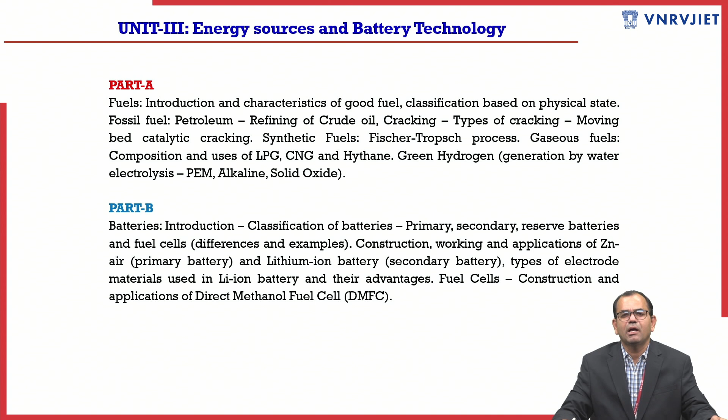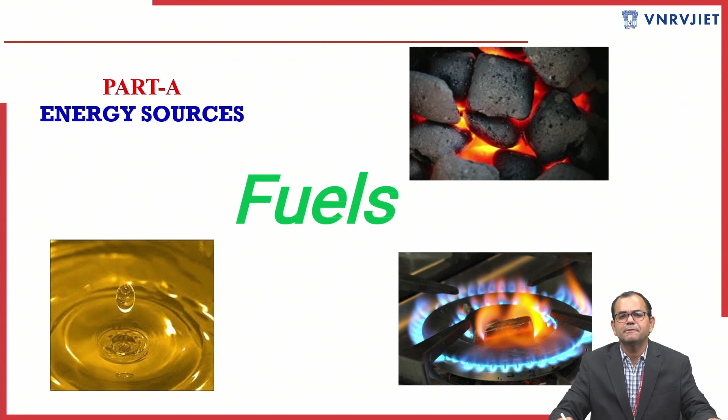Now this is the pictorial representation of energy sources, all three forms. We can see here coal, which upon burning gives energy in the form of heat, and liquid fuels basically kerosene, diesel, petrol, etc. And here gaseous form of fuel, basically CNG, LPG gas, and many others like methane gas, hydrogen gas, etc.

So before going into details, why different types of energies, and what emphasizes us to come up with alternatives - basically growing population means growing demand. Day by day population is increasing. Population increasing means the energy usage demand is going up. So that is why we are always looking for alternatives - thermal energy, hydro energy, wind power, solar power, nuclear power, various alternatives we are looking at all the time. That is because of the growing demand.

So basically when we talk about these fuels, they could be solid, liquid or gaseous. Upon combustion, any material which gives energy in the form of heat, that we can call a fuel. So basically fuels are combustible materials, and combustion happens inside the machinery - it's an internal process, not like burning which is an external process. So combustion is an internal process, and upon combustion there will be some byproducts like soot and smoke released, along with energy that helps us for the vehicles.

So this fuel is basically made of carbon and carbonous materials, and hydrogen. Main source of fuel is carbon and carbonous materials. Our other alternative is hydrogen and hydrogen energies. Now as represented, fuel - carbon plus oxygen - leads to heat energy. This is the energy. Whatever carbon dioxide and water molecules are given represented, those are the byproducts. So we are looking for this heat energy - fuel in the form of carbon, upon burning with oxygen, whatever energy is released, that is what we are looking for.

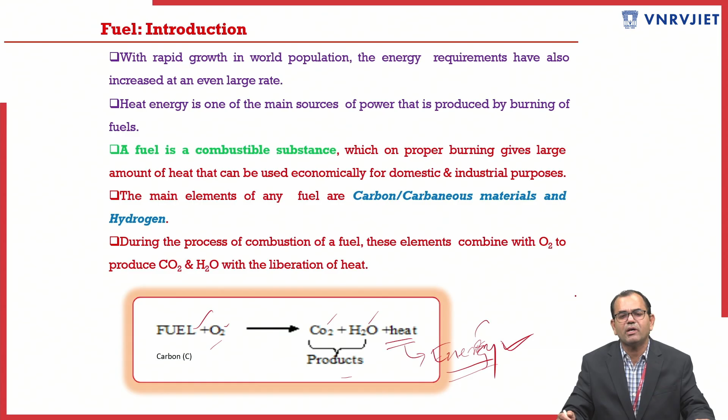Now basically based on the occurrence, these fuels are broadly categorized into two types: primary fuels and secondary fuels. Primary fuels are naturally occurring - these are natural resources like coal. Coal we are not creating. For example, when we talk about Singareni Collieries coal mines, located in Telangana, we dig and send that to NTPC, National Thermal Power Corporation, and upon burning that coal, steam will be generated, and that generated steam will be used for electricity production. That coal mine is a naturally occurring fossil and naturally occurring fuel.

So likewise, crude oil - when we talk about Gulf countries like Bahrain, Dubai, Kuwait, Saudi - all these Gulf countries have rich wells of crude oil, and that crude oil as it is we cannot use for vehicles. So once we refine it, only then can we use that crude oil for our vehicles in petrol, diesel form. So crude oil is a primary fuel, that is a fossil fuel, and whatever is extracted, the purified one taken from the crude, that is the secondary fuel.

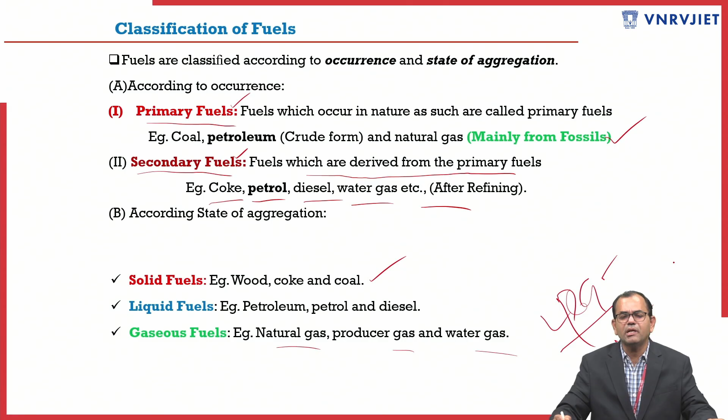Before going into the refining of petroleum and its applications, what are the characteristics of a good fuel? Fuel could be solid, liquid, or gaseous. What characteristics should a good fuel have? The fuel should be available at low cost so that everyone can use it.

It should have less moisture and ash content. Impure fuel gives more noise, more smoke, and more soot. The purer the fuel, the more the efficiency will be, and byproducts will be less. So a good fuel should have less moisture and less impurity.

It should have high carbon content. Greater the carbon content, more the energy. Lesser the carbon content means more impurities, and the energy will be less. So high carbon content means more energy, specifically in the form of heat, energy will be released more. The calorific value should be more.

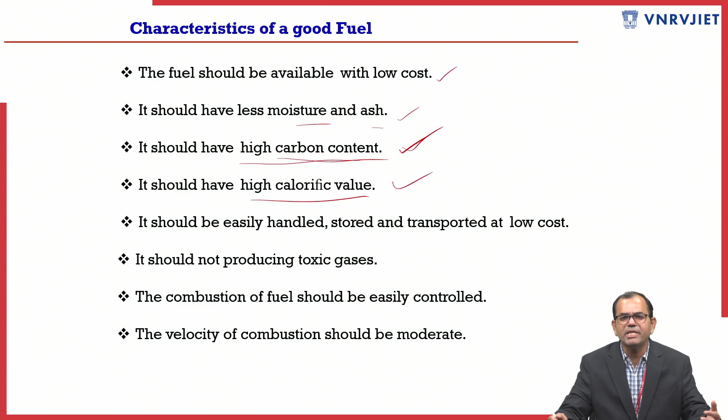Calorific value is nothing but: if we take 1 liter of petrol or 1 ton of coal, after burning 1 liter of petrol, how much energy is released? Or after burning 1 ton of coal, how much energy has been released? That is a specific volume and quantity - 1 kg, 1 liter, 1 ton. So from that specific quantity of coal and petrol, how much energy is released after burning - that is nothing but calorific value.

So any fuel should have more and more calorific value. And it should be easily handled, stored and transported.

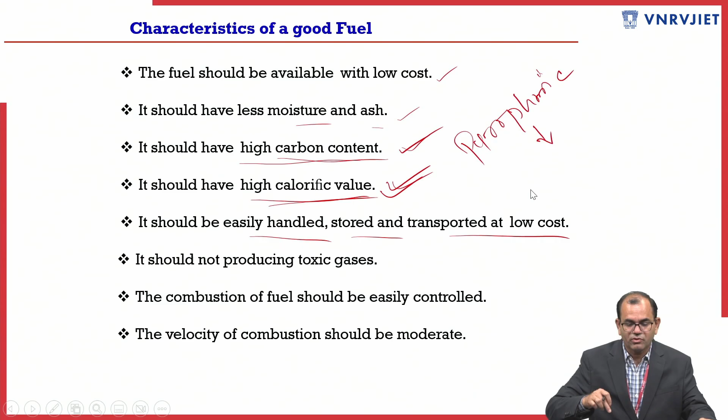As we know, petrol, diesel, kerosene are all highly pyrophoric. The word pyrophoric means which readily catches fire - fire sensitive. Pyrophoric means fire sensitive.

So when we are transporting and storing these kinds of fuels, we should be very careful. There should not be any fire accidents and there should not be any volatile kind of things. The fuel should not produce toxic gases like carbon monoxide, carbon dioxide - emissions which are harmful and lead to air pollution. So toxic gases should not be released.

Combustion of fuel should be easily controlled. Consistent ignition should take place, and velocity of combustion should be moderate - controllable, moderate. There should not be any sudden burning of fuel, because if there is sudden burning, explosion may take place. So these are the major characteristics of a good fuel.

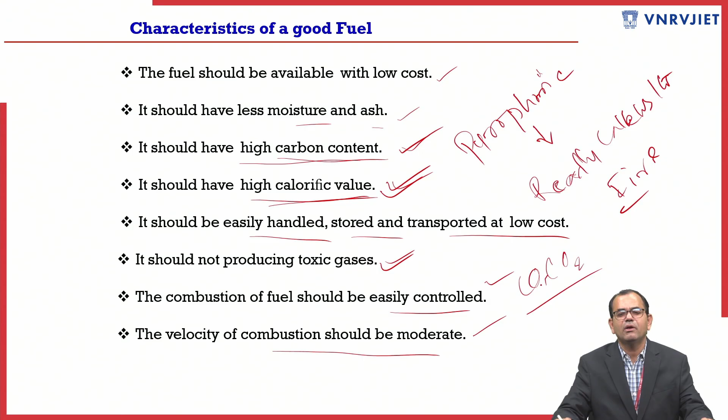Let me move forward. When we talk specifically about liquid fuels - petroleum, which is crude - petrol, diesel, kerosene are the refined products from this petroleum. Petrol is nothing but a mixture of hydrocarbons. Diesel and kerosene are byproducts from this petroleum. Petroleum is crude, as I said.

What are the advantages of these liquid fuels? They burn without forming ash and dust, and they are used in internal combustion - internal combustion is an internal process, burning is an external process. They are easily ignited and emission is easily controlled. Less amount of air is required for combustion because it is an internal process.

Loss of heat energy will be less - we can minimize that loss. They are easily transported through pipes because they are in the liquid state phase. Liquid fuels have higher calorific value than solid fuels.

And certainly there are some disadvantages. Care must be taken while storing - if it is volatile, petrol can easily evaporate, and sometimes they can easily catch fire, being pyrophoric. Sometimes they give hazardous and odd odor which is irritating, so we should be careful about these disadvantages.

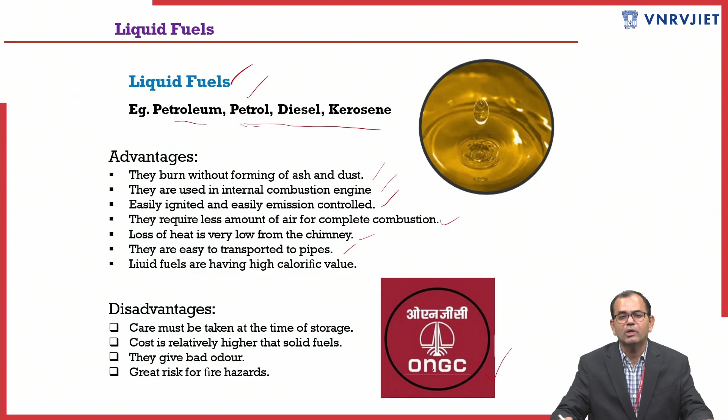Here we can see one major company in India, ONGC, Oil and Natural Gas Corporation, which helps us refine this crude and extract these liquid fuels. Petra is nothing but rock - when we drill, there are earth crust layers, and from those rocky layers we take it up by sending compressed gas and applying hydrostatic pressure. We dig it and take it up - petroleum mostly comes from the rocky mass, the earth crust. That is why petra means rock and oleum means oil - that is petroleum, the raw material byproduct.

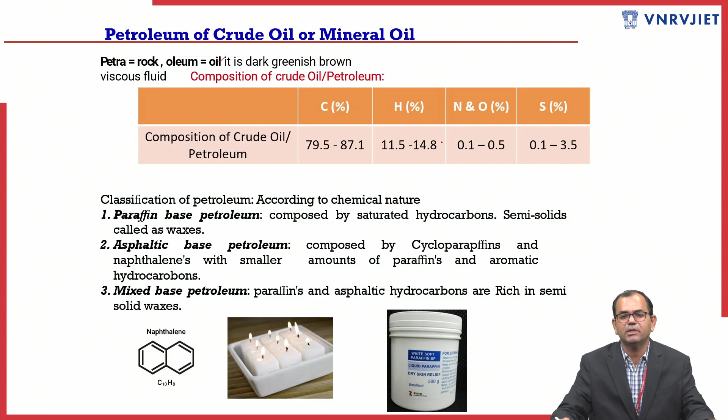Hydrostatic pressure relates to liquid. When liquid is compressed, pressure develops that can be used to take something up, especially for natural gas drilling purposes, to pull up the natural gas. When we do this kind of drilling, there is a bore well, and we send compressed air.

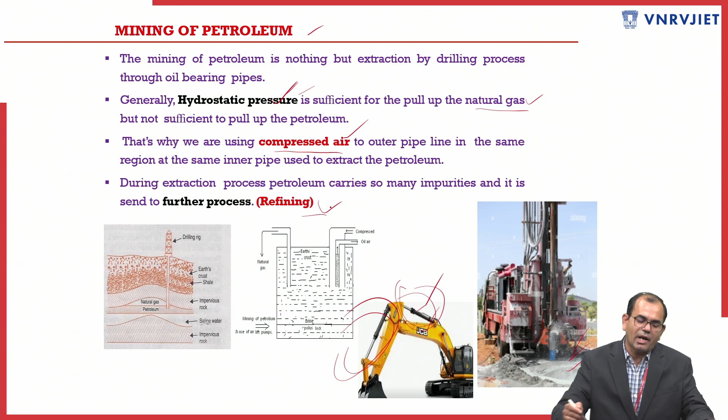With this concept of hydrostatic pressure and compressed air, we can do the mining of petroleum, that is extraction of crude, or pulling up the raw material from the earth crust. Once we take away that crude, we have a process called refining, because during extraction, petroleum carries many impurities, so it is sent for further processing. Initially in Gulf countries, whenever extraction is done, the petrol comes in the form of crude, which is a mixture of many chemical compositions. So we have to separate kerosene, petrol, diesel, wax, grease, everything from that crude. This process is called refining.

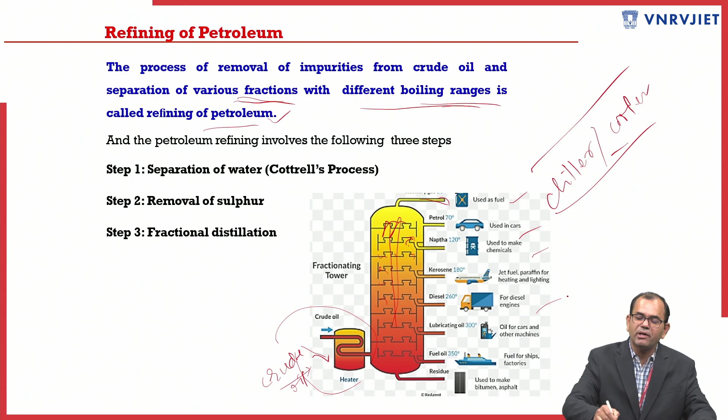So later we have to take out those vapors and pass them through the chiller or cooler. With that, those vapors will be condensed, and finally we can separate diesel, petrol, kerosene, everything. This refining can be done in three ways: first, separation of water through the Cottrell's method; second, removal of sulfur impurities; and finally, fractional distillation.

Fractional distillation is nothing but heating up the crude, and based on their boiling point differences, the vapors are separated. Later, those separated vapors are passed through chillers or coolers and allowed to condense. With that, we can separate petrol, diesel, kerosene, etc. This is the process we call fractional distillation, and the whole setup related to refining of petroleum.

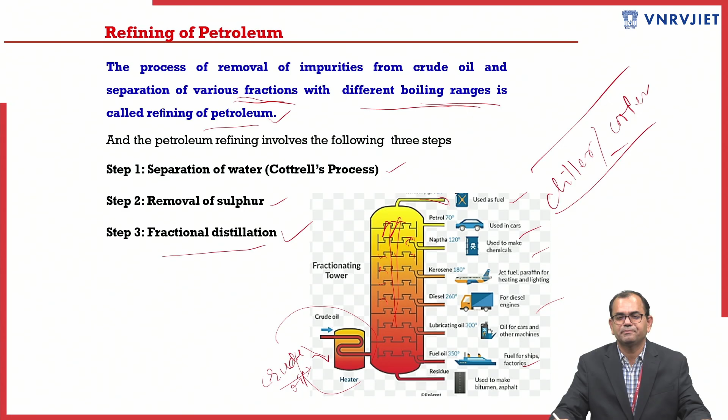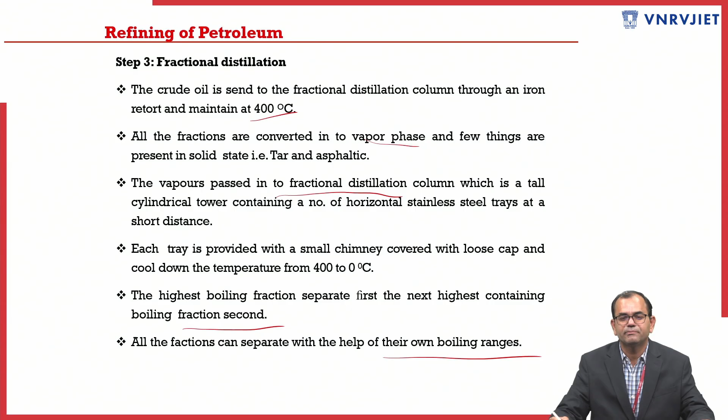In fractional distillation, basically we maintain more than 400 degrees centigrade. Fractions are converted into vapors, which are passed into the fractional distillation column, and later passed through the chillers, and finally we get condensed and separated fuels in the form of petrol, diesel, kerosene, liquid fuels.

Now another interesting process for these liquid fuels is cracking of oils. Cracking is nothing but, once we have done fractional distillation and extracted petrol, diesel, kerosene, taking one bulk product and making two different useful products.

That is nothing but cracking, or breaking down a bulkier molecule into two smaller useful molecules. Here we can see the best example, decane C10H22. By using the method of cracking, we have separated it into pentane and pentene, two different useful compounds. This is the macromolecule, decane. From decane, using this cracking method, we produced or separated two different useful components, that is pentane and pentene.

Not only this, when we do this cracking, sucrose, a bulkier molecule, can be converted into glucose and fructose. So cracking is the process of conversion of larger hydrocarbons, that means bulkier molecules, into smaller useful hydrocarbons or smaller useful components. That is nothing but cracking.

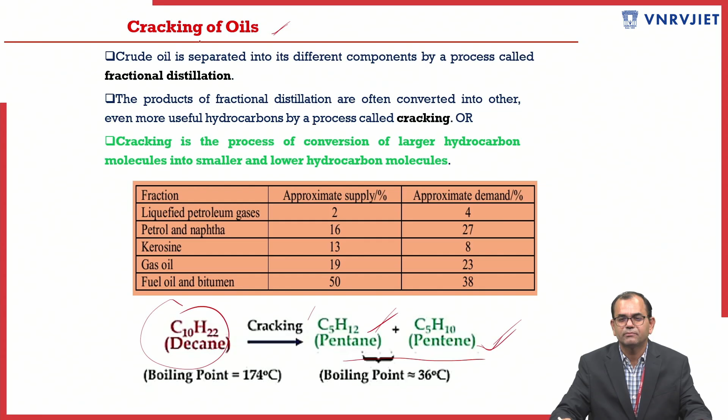Thermal cracking, as the name suggests, is related to temperature. That means we are applying temperature and breaking down bulkier hydrocarbons into smaller, useful hydrocarbons. So thermal cracking is related to temperature, and that process is called Burton's process.

The second one is catalytic cracking. Catalytic cracking definitely needs a catalyst. We all know a catalyst enhances the reaction and boosts the yield. So we use different kinds of catalysts to enhance the product or reaction. That reaction basically involves breaking carbon-carbon bonds or carbon-hydrogen bonds, so we get bulkier, larger hydrocarbons converted into smaller hydrocarbons.

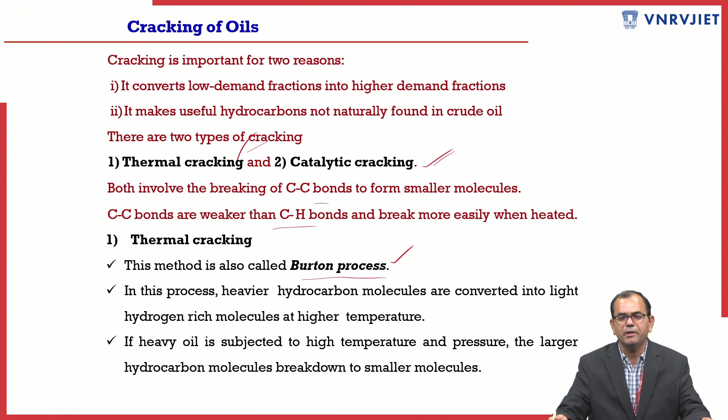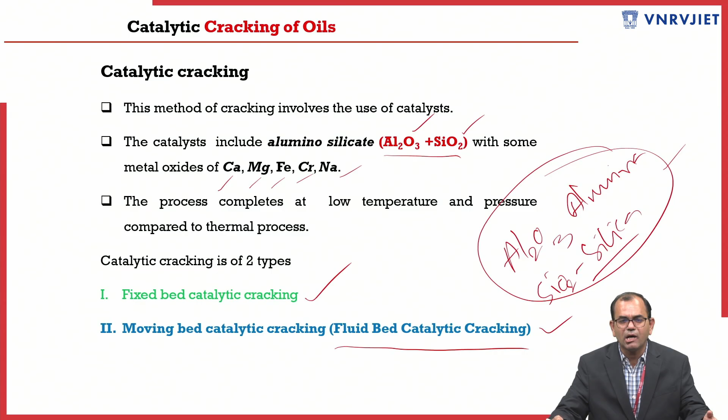Not only this catalyst, but metals like calcium, magnesium, iron, chromium, and sodium can also act as catalysts. But here in catalytic cracking, for our fuel cracking purpose, we use this aluminosilicate. This catalytic cracking is broadly categorized into two types: fixed bed catalytic cracking and moving bed catalytic cracking. Moving bed catalytic cracking is nothing but fluid bed catalytic cracking. Why do we call it moving bed or fluid bed catalytic cracking?

Let us see. Moving bed catalytic cracking is a process that utilizes small beads or pellets of catalyst to efficiently convert heavy hydrocarbons into lighter or more valuable products like gasoline. This catalyst, aluminosilicate, will be agitated with gas at a huge temperature of 5500 degrees centigrade. How is this done?

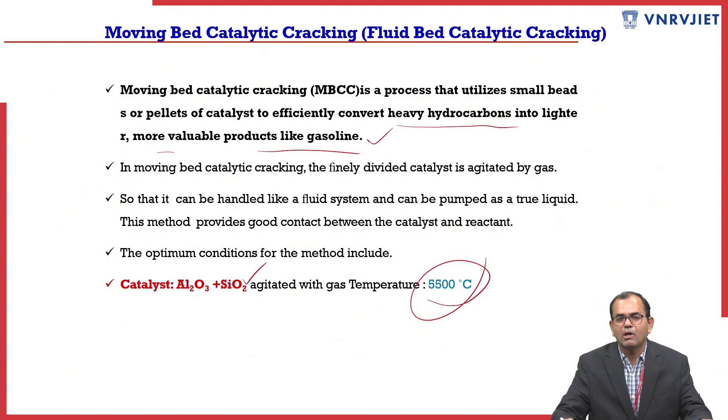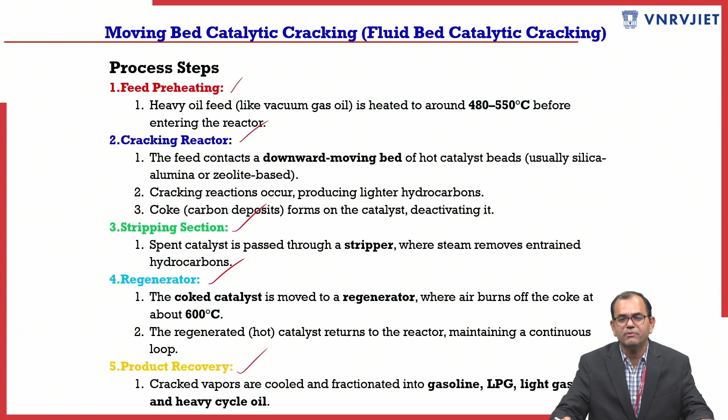Let us see this in detail. The process involves feeding, preheating, the cracking reactor, stripping section, regenerator, and product recovery. All these are the steps involved in moving bed catalytic cracking.

Now here there is a setup to understand this moving bed or fluid bed catalytic cracking. This is the crude chamber, where we insert the crude. Once crude is inserted, we apply temperature, and there is a catalyst insertion chamber. We can see here, this is the catalyst regenerator. Once we send this catalyst, that is nothing but Al2O3 plus SiO2.

What will happen? We have to send compressed air. What does compressed air do? The raw material of crude and this aluminosilicate catalyst, with the help of compressed air, will be homogeneously mixed like this. There is homogeneous mixing, and this mixture of crude and catalyst acts as a fluid which can be easily moved with the help of compressed air.

So now the crude has been mixed with the catalyst. Whatever impurities are there in that crude oil will be separated with the help of aluminosilicate. So the impurities will be attached with the aluminosilicate catalyst, and then finally, since it is in the moving position, fluid in motion.

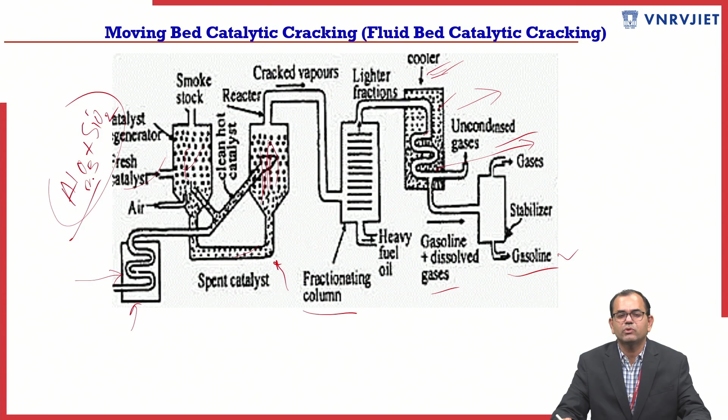Catalyst movement is very important with the help of compressed air, and we must continuously pass that compressed air for homogeneous mixing of the catalyst and crude oil, for fraction separation. There are some advantages: simpler mechanical design, no fluidization required, easier temperature control due to solid catalyst circulation, and suitability for moderate feedstocks and refineries of smaller capacities.

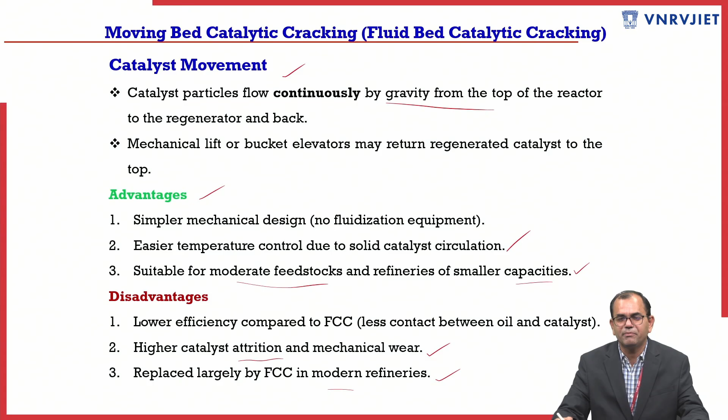And certainly there are some disadvantages: lower efficiency, higher catalyst attrition, and mechanical wearing is required, largely replaced by FCC in modern refineries which are expensive. These are some of the disadvantages.